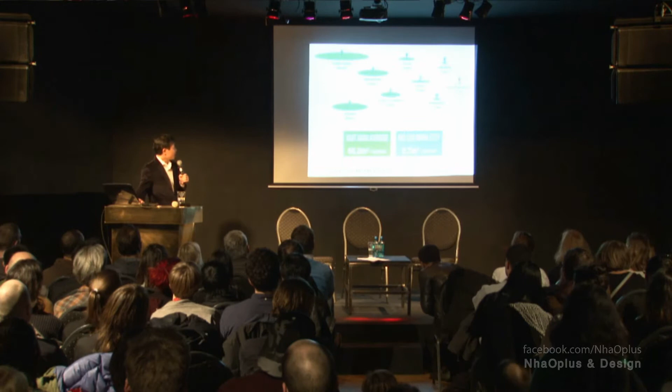With more than 10 million living in Ho Chi Minh City, we have a really big problem with pollution. And the greenery in Ho Chi Minh is just 0.7 square meter per person, really low compared to other cities in the world. We have a lot of problems with pollution, flood or overheating. The biggest problem is inactive people are increasing very fast in the city.

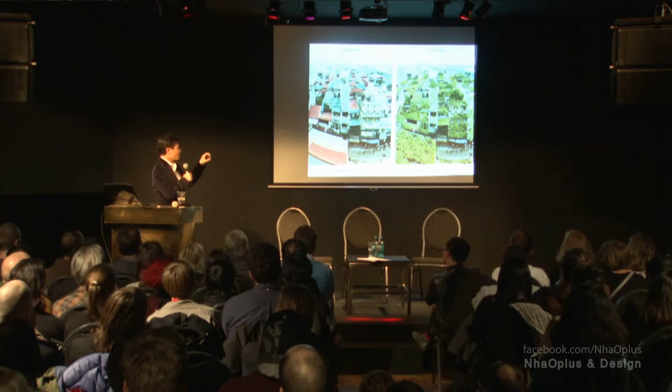Then our goal is making the city from that situation into green space like a park, through each project, like a house or university or building or hotel. Let me explain this first. This is a house for tree. We designed this for my friend. He became inactive maybe because of pollution, and we designed this for him to have more connection to nature. Because of that, we designed a tree pot, like a pot for a big tree, with bamboo formwork concrete.

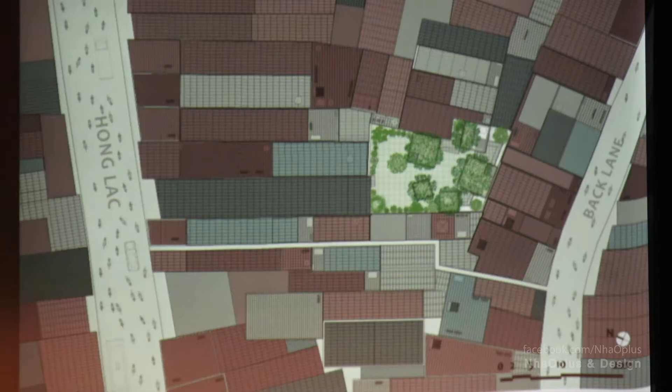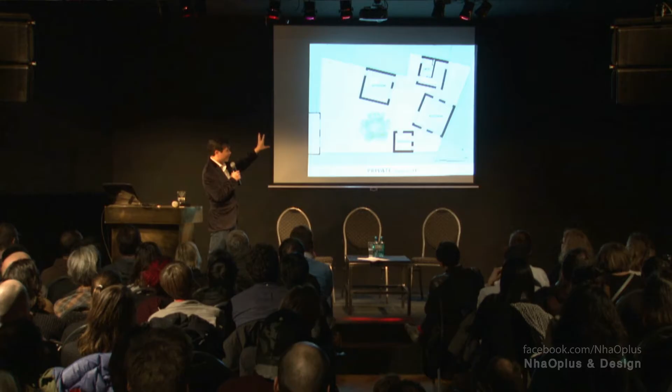It looks a bit closed, but it opens to the inside, and it's really green all around with a steel roof. Then suddenly you can find a really big green in the middle. The house has 5 pots put into the garden, with many courtyards around. From the bedroom to the bathroom is only nearby 2 meters, but we would like to let him go out even in rain or sunlight; here we don't have winter like in Berlin. The tree pot is like this.

He was really minus, living in a small room, didn't want to talk with any person, but when he lived here he became super plus, and he is normal now. And 1 week ago his wife sent me a message: I don't know if this house belongs to our family or to the birds, because many birds come the whole day, and they are really enjoying living in this house at this moment.

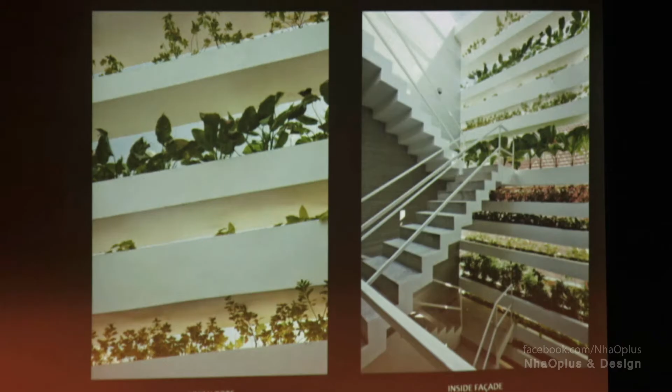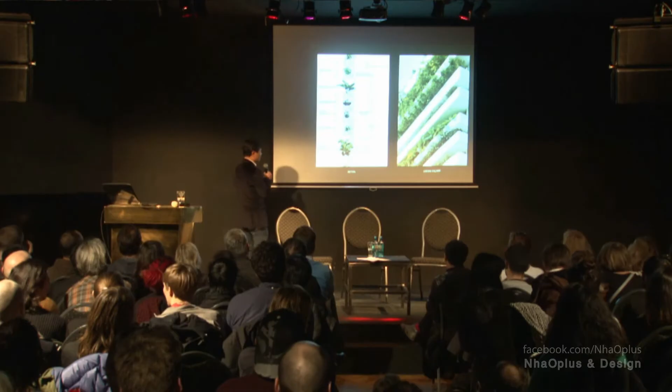And this is the Stacking Green, a typical house in Vietnam, 4 meters by 20 meters. We designed the house to have green cover the whole house, to have greenery everywhere. Then with the stone wall, we cut small pieces of stone left over when they make big stone, to make the wall, because the labor cost in Vietnam is still reasonable. Here maybe you have double skin, meaning glass, air and glass. But in a climate without winter like Ho Chi Minh, we would like to have green, air and glass. That is more tropical.

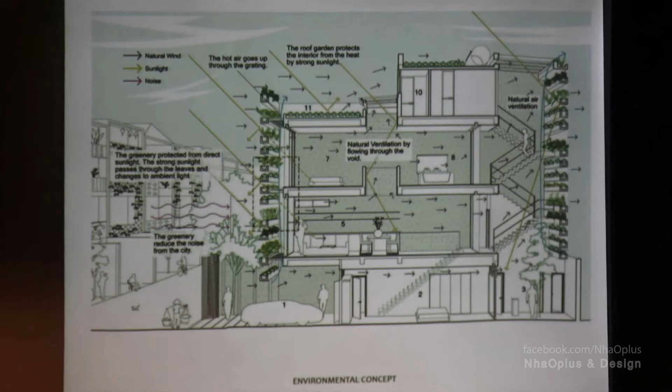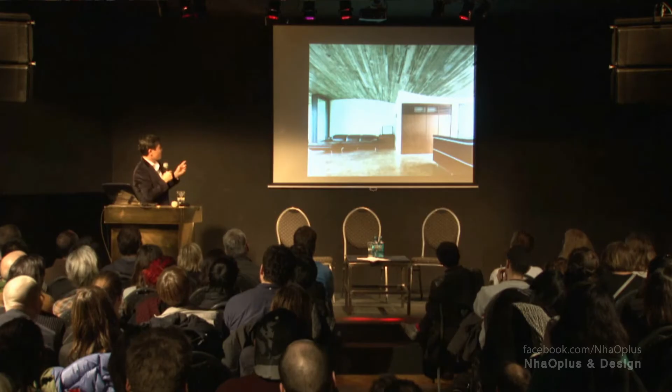And this is the environmental diagram: the greenery is like a filter to cut the very strong sunlight and the noise, and let through the wind. And this house we designed with greenery, and also made the concrete pattern for the double skin, and the space between the greenery and open space, with big shadow because of the gap. And we are doing the concrete curve here, which is also really difficult to construct in Vietnam.

This is a really traditional way of making 20th century buildings in Vietnam, with a concrete pattern like this, and we apply this, but we do the concrete and the buffer zone and the space inside. It looks like this.

And this is recently completed in Vietnam. This also we try to make like the concept of House for Trees, to stack many gardens on many levels together, and then when you go inside the house, you can see many levels of the garden together. And here, for example, when we are in the bedroom here, we can see through the dining room, living room, master bedroom. You can see this garden and see through.

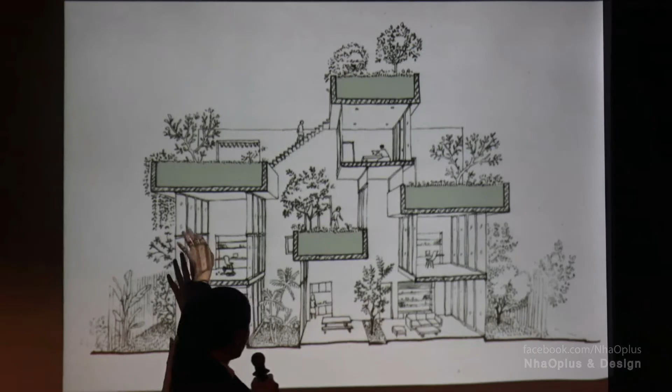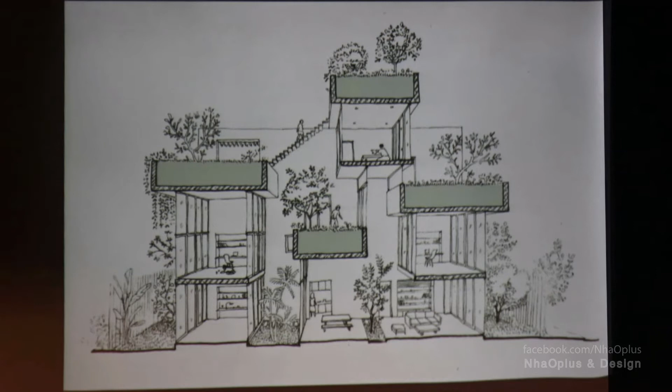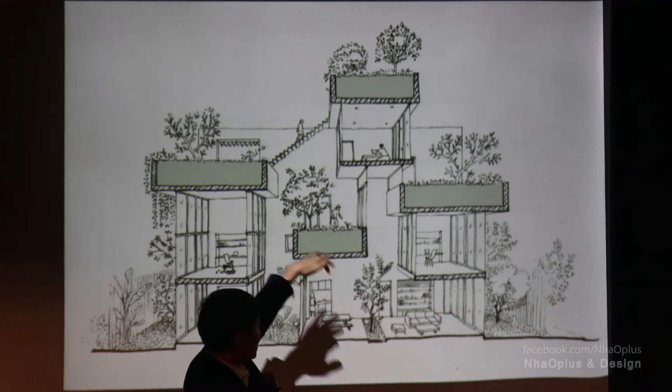And here they have 2 boys, and the requirement is connecting people together. And we think it's people with people, human with nature, because nowadays the problem of our society is the internet and working a lot, and then we are disconnected from nature. So in this house we design many levels of connection together, with the wind, with the space, with the greenery, with many levels of greenery and garden together.

And then it's really easy to see each other inside this house, to have more connection with each member of the family and with nature also. And we do the farming. For example, here is from the master bedroom. You can see the dining room, living room, the bedroom there, one step of garden, and then the other garden. And you can call the children really easily.

Yes, here is from the garden to see the dining and the master bedroom, and up is the library. And from the bedroom here, you can see through the garden, dining room, living room, the master bedroom, and the library. And what the picture cannot show here is the sunlight movement and the wind that can pass through, and then you can feel the connection between.

And here from the master bedroom is the dining room and living room. Here you can see it, and here is a bedroom. Here is one more bedroom. The first step garden and the other garden are connecting. Yes, and from the garden, from the library.

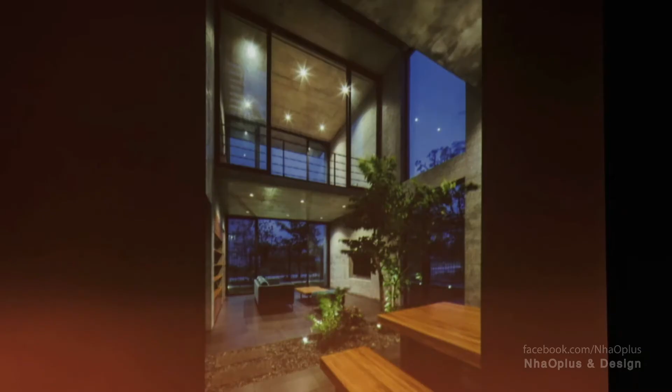The next house is in Nha Trang, and in this area the first requirement is a slope roof, and 60% of the roof has to be tile roof, and then we do like a step garden to make a terrace on that, and this is also like a small park for the community.

Again, we are still talking about how recently in Vietnam the most important thing is quality of construction and quality of detail. We say we do something for the community, but 6 months, 1 year later, there is water leaking or damage or something like that. I don't think that will be the sustainable one. Then we apply really simple details, but how to make the building last like 100 years of long life.

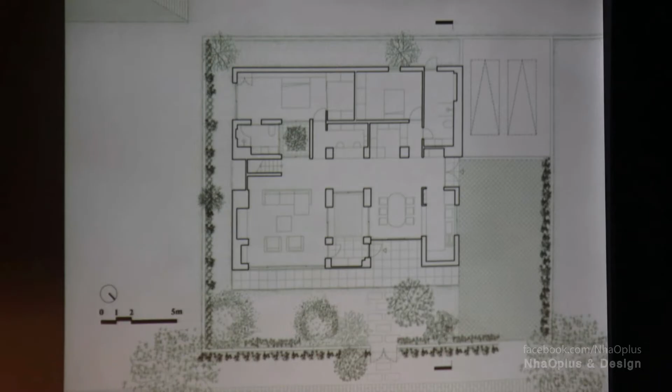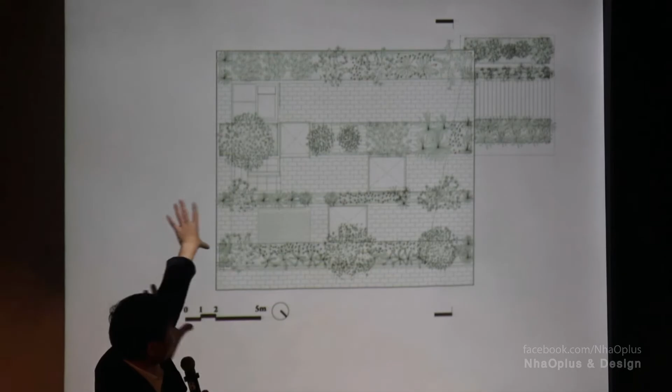Then we designed this house with really thick walls, really thick and simple brick detail, and between the courtyards and the rooftop, many small courtyards to have good ventilation, and we do the rooftop on that. 40% is the garden, the other place is a terrace, and the space inside, the bedrooms and the small courtyards. This is like a garden for the other buildings around, but it has 4 bedrooms inside, really big space, enough.

And this one is the farming kindergarten. This is for the shoe factory workers. They have more than 20,000 workers working for the shoe factory, and we built this for the factory workers' children.

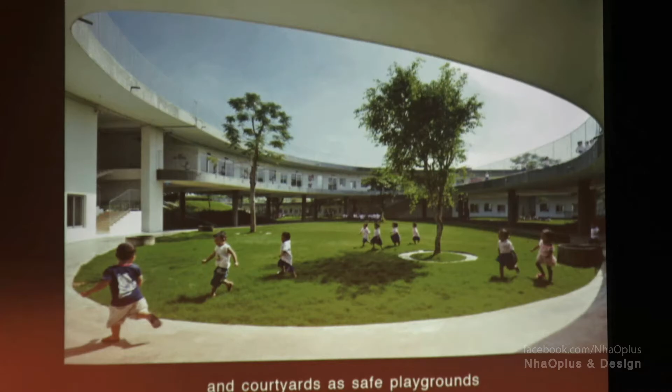Because there is not a lot of space for children in Ho Chi Minh City, we designed this shape, with 3 courtyards connecting together. There is the factory, and here we do 3 courtyards connecting together and maximize the space to the roof, and we do the farm on the rooftop for the children. They can enjoy the activity of farming there.

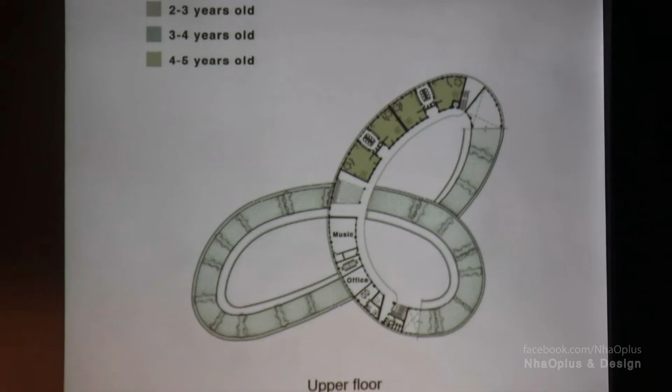The 3 courtyards are different. For example, 2 to 3 years old, 3 to 4 years old, and 4 to 5 years old, and connecting together. We also designed this with no air conditioning, and it keeps really low cost.

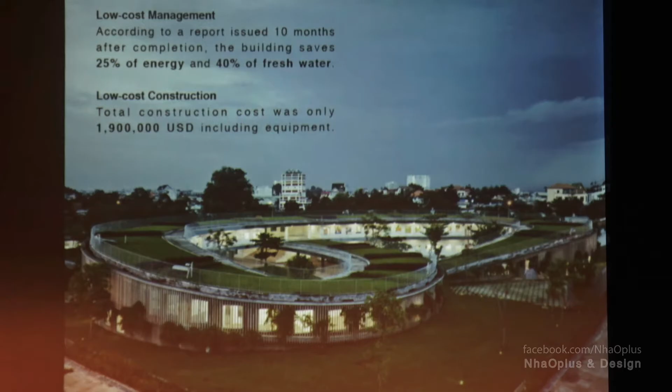And this one just finished recently. The construction quality is not good enough, but it's still okay. This was done by a government construction company. Then we cannot control the construction detail, but from far it's still not bad.

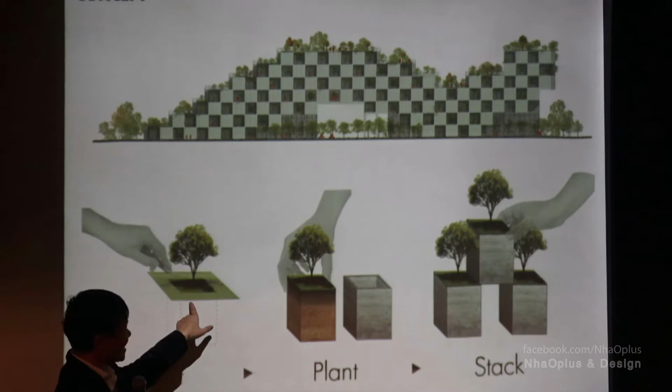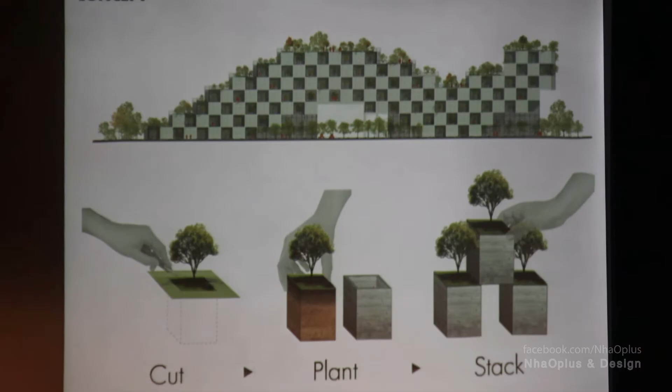But our concept is still like this. We put it in the pot, and we stack that together, and then we have this system. The system is really simple, reducing the construction costs with a simple structure, but we still can achieve our concept about greenery, greening the city. And now the tree is getting bigger. The tree is ficus, so it's quite easy to get big. And then, yes.

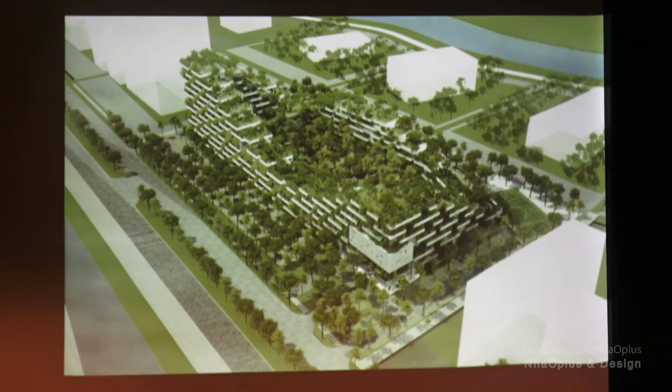So now we are ordered to make one more campus for the same university in Ho Chi Minh. With the same, but with 2.3 hectares, they required us to design the university for 5,000 students in half a day, and 5,000 more in the other half day, so 10,000 here.

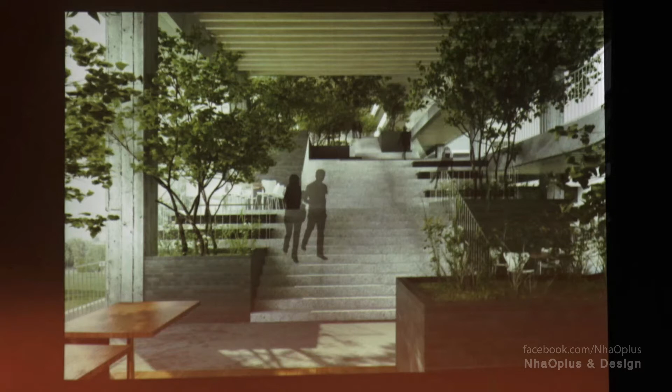So we tried to make activity space for them. We make this like a mountain. They have an exercise course on the rooftop, and also through the building we make a cut through the building for more activity places, for them to go to the roof and into the building.

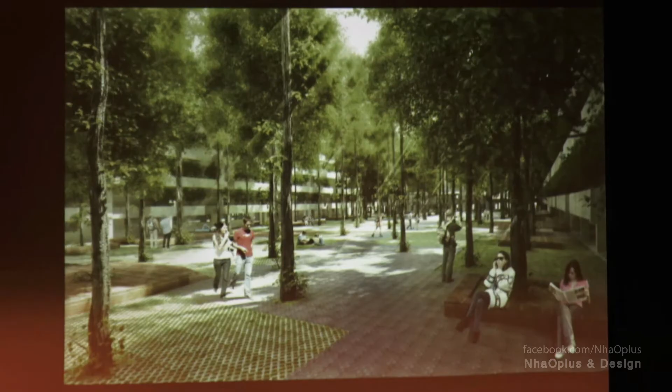And we also designed the courtyards with really typical trees in Vietnam, to make a big forest for them to have a place to read books or something like that, and the rooftop is like an exercise court. And this is now under construction.

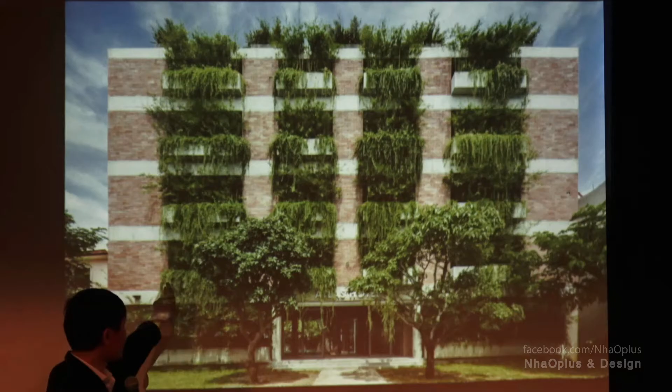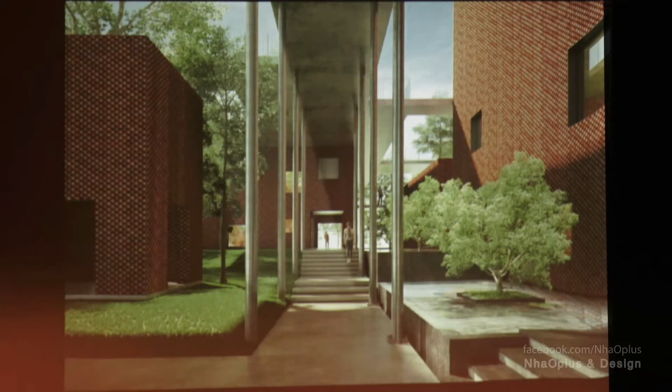In summary, this building also makes open space between each box, and we make the corridor by concrete, and this is a double layer of brick wall. We try to do a double brick wall with insulation, and also the water.

And now we have done all of the frame, and we are now starting to make the brick wall at this moment. It's the space between each box, and also the connection between the boxes and the courtyards. We put the boxes, three parts, inside the garden and connect all of them together by one corridor. It looks like this.

And we would like to show you some of our bamboo work. This is our first pure bamboo structure, in 2008, and at that time we tried to make it low cost. It's made up of 3,000 bamboo pieces. At that time, one piece was less than $1, so we just spent $3,000 for material.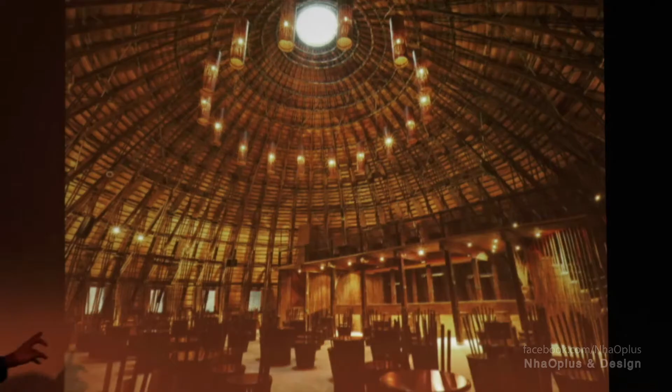And first, we put this in the water to get good ventilation, to try not to use air conditioning. It's from 48 units: at the beginning we did 1 unit, and then we let them copy it to 48 units. And this is the second. The first combined steel and bamboo, but this second project is all pure bamboo structure.

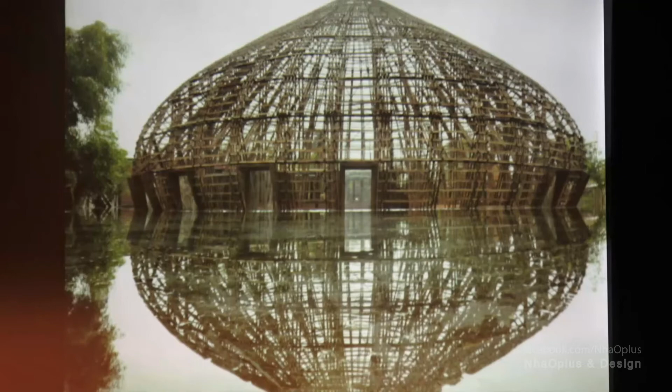And after 10 years of renting the land, the building condition is still very good. Then we disassembled it to put in storage, and maybe we will sell it to someone. And here, because it's a unit, we control the construction site really well.

After that, we tried to achieve the next bamboo structure with a cantilever. It has a 12-meter cantilever like this, with the water around, and the space is lower than the water, so it's like a natural air conditioning system. It's like this.

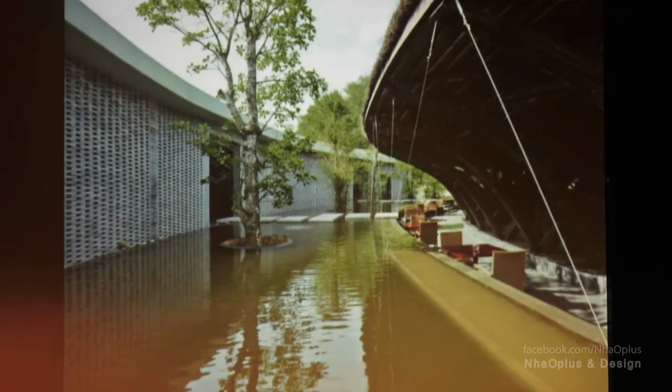And the structure is like a wing, 12 meters, and we have the tension on top, supporting by tension like this to keep the wing stable. And the space is a bit under the water, so you feel you are sitting on the lake.

And recently we finished this one in Sơn La. It's really far away from the center of Hanoi, takes 7 hours from there. So we try to use all of the material—normally we use another kind of bamboo, but it's far to transport here, so we try to use this kind of big and straight bamboo from this area.

And then one more thing that's really hard and challenging is to control the quality of construction on this site. So we reduce the number of details. For example, here, one kind of detail, and on top of that, only one.

The supporting there is the same as here, and we make the stone box around this, and the roof is covered by bamboo, and then horizontal supporting connects to this box or that box. Some of the stone boxes are lower, then suddenly you have a space really close to the roof.

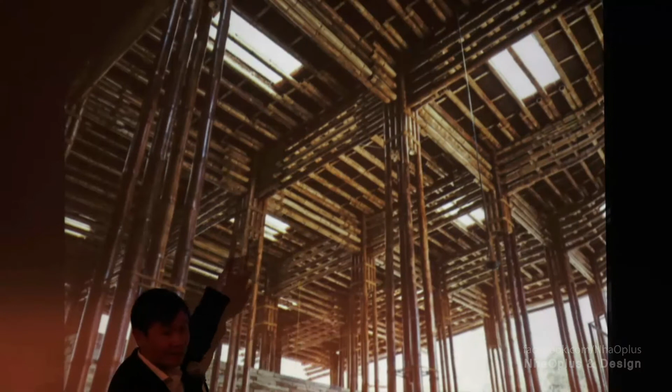And then each box, you can see through to outside, and it connects to the outside like this. We tried to do some mock-ups, the stone mock-up, and we made this building with really simple detail. Yes, we do only one kind of detail and copy that to the system, and some is lower than this, giving us this kind of space.

And this one we built for a selling gallery, like a community center, but it's for selling real estate. Now they remove this to make a big apartment here.

And then we did this structure like a net to keep chickens. I copied that at a bigger scale, and then made the roof outside with the same design—I just copied that to make it bigger.

And this is the thing to keep the chicken, and then we make it bigger and make the roof around. Here is exactly the chicken coop one.

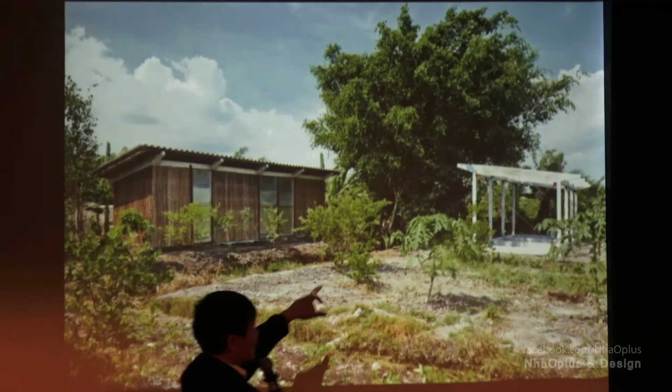So we try to make the next one. This one has really good quality of construction because we make it precast concrete, but the problem is each element is too heavy. It's too heavy, which drives up the cost—we try to make it less than 3,000 each, but if it's too heavy, people can't do it by themselves, so we'd have to go build it for them, and then it becomes expensive.

Then it's like this.

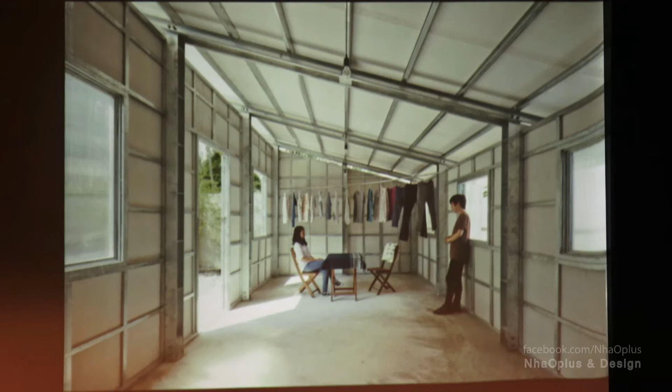After that, we tried to make it by steel, with each element less than 60 kilo. Because, for example, in some areas like the Mekong Delta or somewhere in Africa, trucks cannot get to the place to build a house, so two people can carry one piece easily. We designed each element to be less than 60 kilo so it can be easily assembled by themselves, and even the foundation pieces each have to be less than 60 kilo too.

And this can be assembled in 3 hours. We tried this, but it still had problems with the roof and the wall, which would make the cost go up. In Vietnam, a reasonable cost would be like 3,000 US dollars per house.

And then we did the same one for the Chicago Architecture Biennale, but with a different touch. We can sell this as only the frame—the frame is only 1,000 kilo, with the steel it costs only 1,000 US dollars for direct cost. I mean the cost of the whole frame and window is only 1,000 US dollars.

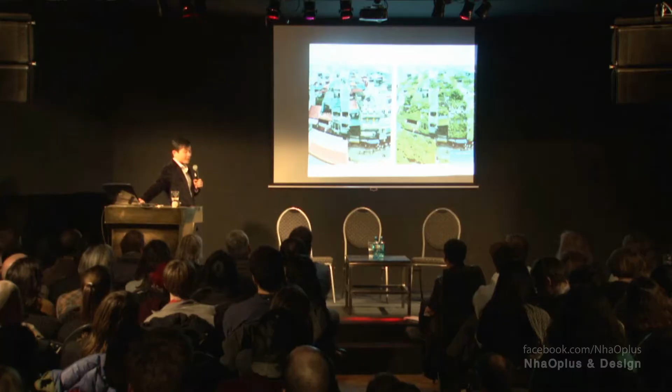Then people, if they're in a poor area, can make the roof or the wall by themselves, by hand or something like that. We showed this at the Chicago Architecture Biennale. Yes, this is the final thing.

And then we are now trying to transform the city from this situation to that situation through each project, even the small house, even the university or the master plan. We're also trying to convince the government to relax regulations so that some areas can make green roofs without permission or something like that. And recently in Hanoi, they're trying to plant a lot of greenery for the city. So thank you very much.

I have some notes ready, but while you were talking, I made extra notes. One was, what a modest and honest way of sharing this enormous scope of work. This is my first reaction. It's a very nice way how you tell us, in a modest way, about all the projects. And I like and share your concern and approach to address the problems of pollution and climate change in dense cities. This is what triggers you, I guess.

I remember at this symposium you gave us this quotation saying that for a modern architect, the most important mission is to bring green spaces back to the earth. It sounds really radical and strong, but that's what you do, and you really succeed in doing this. So I think you're right. Architects should address a more holistic approach to their work and be aware that ecosystems in cities are a big issue to think about, and it's about the future life of this planet, human life and beyond.